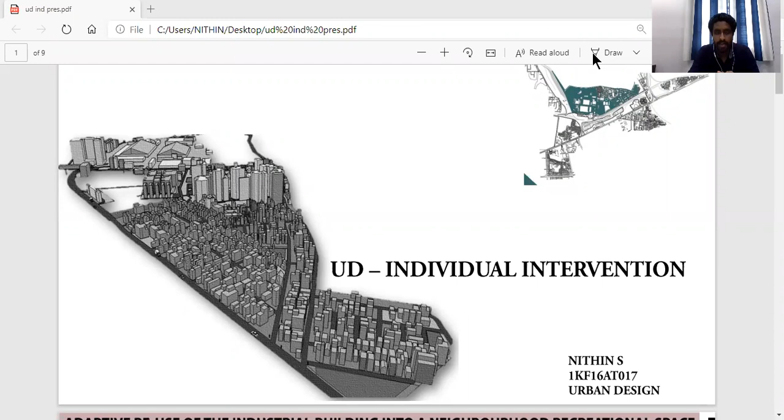This presentation is about the individual intervention proposed for the documented area of Baiyappanahalli. The task was to document a particular part of Baiyappanahalli given to us, find the flaws and negative spaces in and around the site, and propose an intervention to make that space lively, active and useful for the neighborhood.

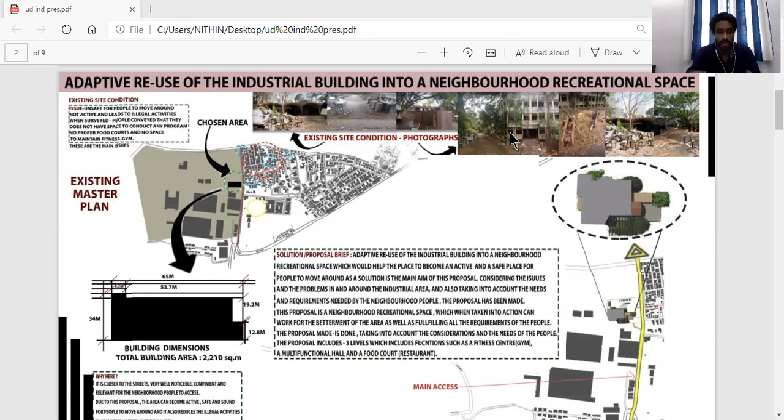My group was given a site near Sadananda Park. This is Sadananda Park and the complete site given to us. We found few flaws and negative spaces in the site, so we thought to make use of those spaces into a recreational space so it could become an active and useful space for the neighborhood.

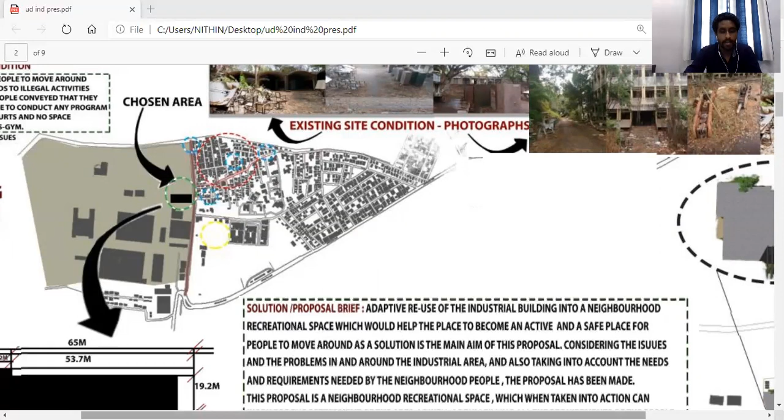Among which, I chose the industrial area. This marked portion is the industrial area. Why choose this particular industrial area is that it has been abandoned for many years, and due to this many illegal activities are taking place in and around the site, which is not safe for people to move around. These images show the industrial area which is not being used for many years.

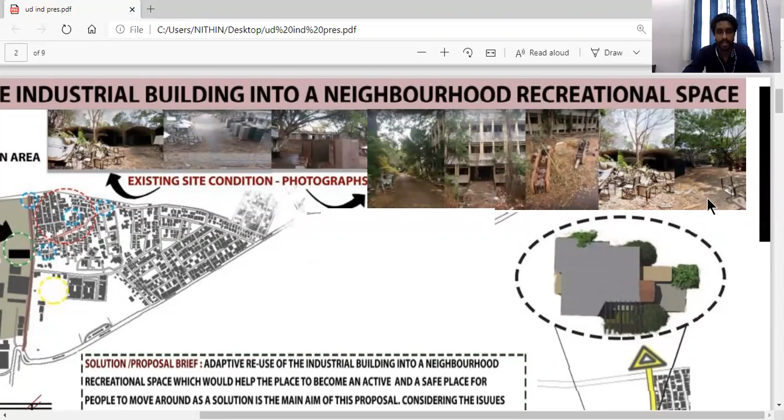As a solution to this, what I thought was to choose a part of the industrial area, in fact choose a building, and redevelop and reuse that building into a recreational space so that it could become an active and useful space for the neighborhood.

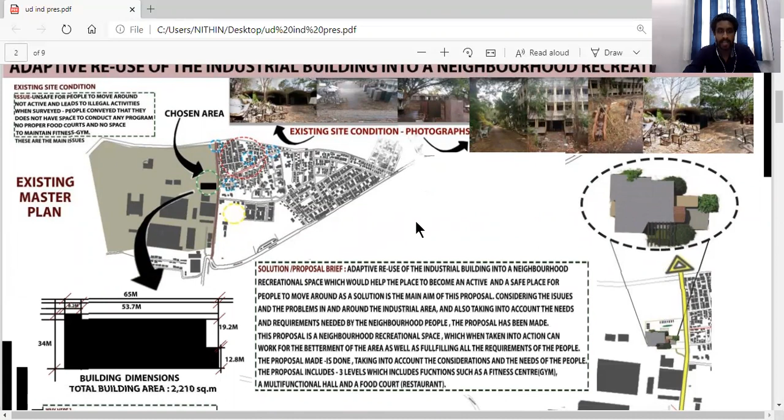So adaptive reuse of the industrial building into a recreational space was the main aim, and it houses functions such as a multifunctional hall, a food court, and a gym.

Why choose these particular functions is that when surveyed, people said they don't have a particular place to conduct any program or function, they don't have a proper restaurant nearby, and also a few of them said they don't have a particular place to maintain fitness or work out. Considering all these facts, these functions have been chosen.

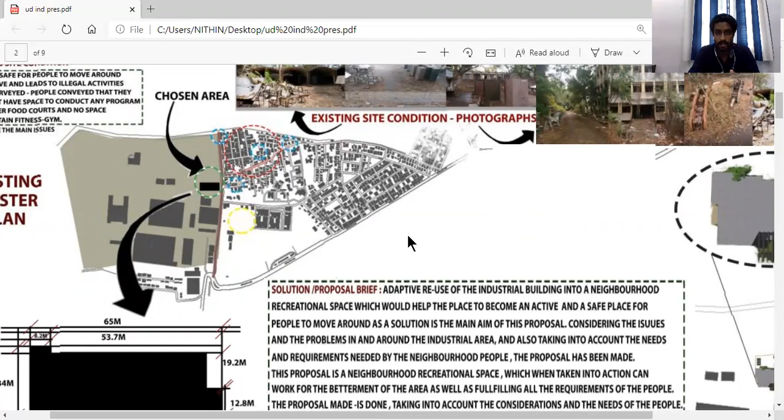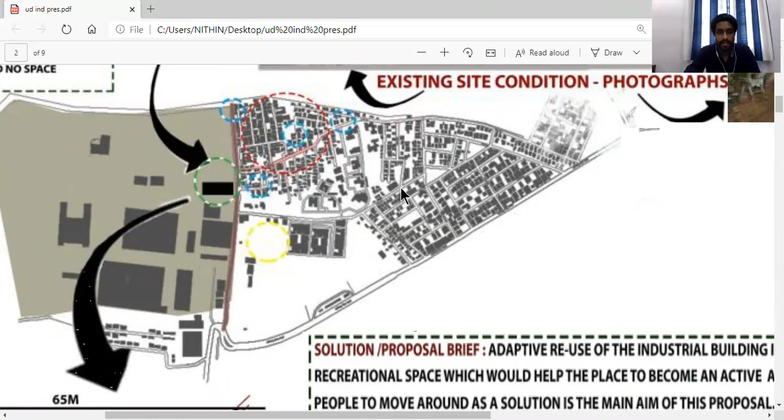As mentioned earlier, a particular block has been chosen in the industrial area. This rectangular block is the block chosen. Why choose this particular block is that it is closer to the streets, relevant, convenient and useful for the neighborhood people to access.

Moving on to the proposal brief of the intervention, the main aim was adaptive reuse of the industrial building into a neighborhood recreational space, which would help the place become active and safe for people to move around.

Considering the issues and problems in and around the site, and also taking into account the needs and requirements of the people, this proposal has been made. This proposal is mainly a recreational space which, when taken into action, can work for the betterment of the area as well as fulfilling all the requirements of the people.

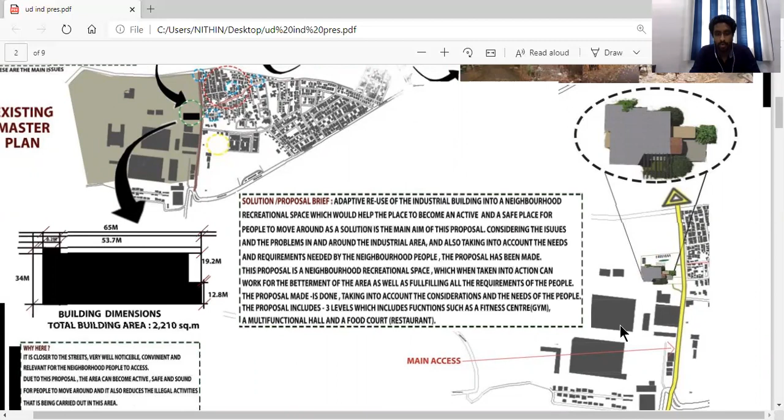As mentioned earlier, 3 functions have been provided based on the survey done: a fitness center, a multifunctional hall, and a food court. This is the existing master plan.

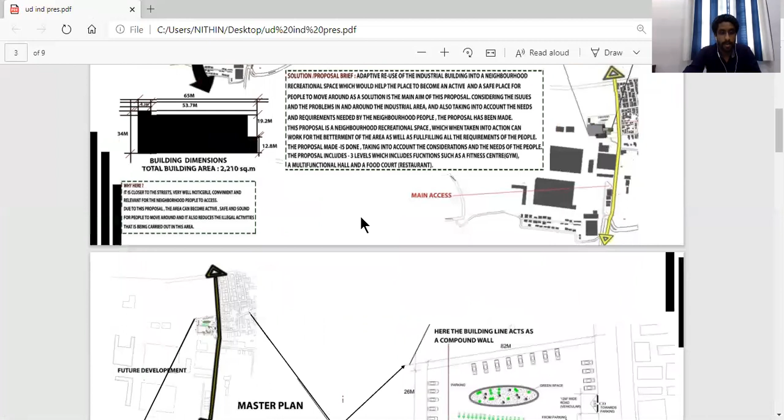Moving on to the proposed master plan, this is the proposed master plan, and this yellow line indicates the main access towards the proposed intervention.

Towards the right, you can see the zoom plan of the master plan, where 3 entries have been provided. This entry acts as the main pedestrian entry. Adjacent to it, an access leads to the parking provided next to the proposed intervention, and also a service entry has been provided. Since there is a food court, a service entry is needed, so this access acts as a service entry.

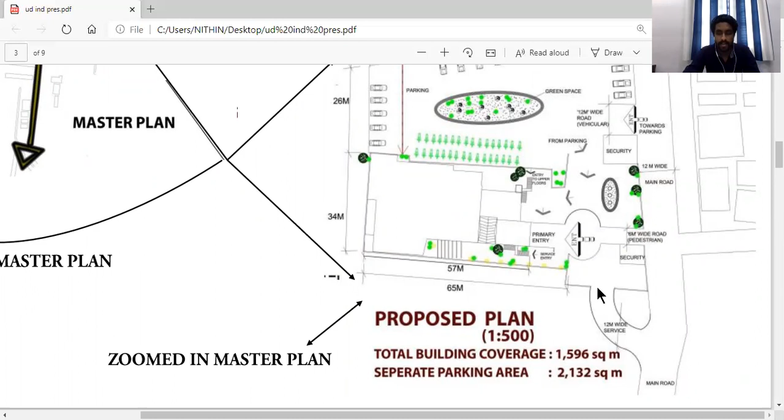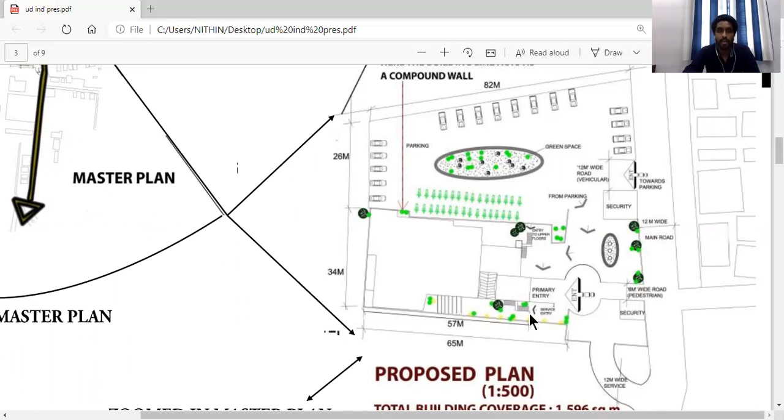This pedestrian entry directly leads to the building, and the left out space has been provided with greenery, as you can see, and has also been retained by a few of the existing trees. The total building coverage will be about 1,600 square meters, and the parking provided spans an area of about 2,130 square meters.

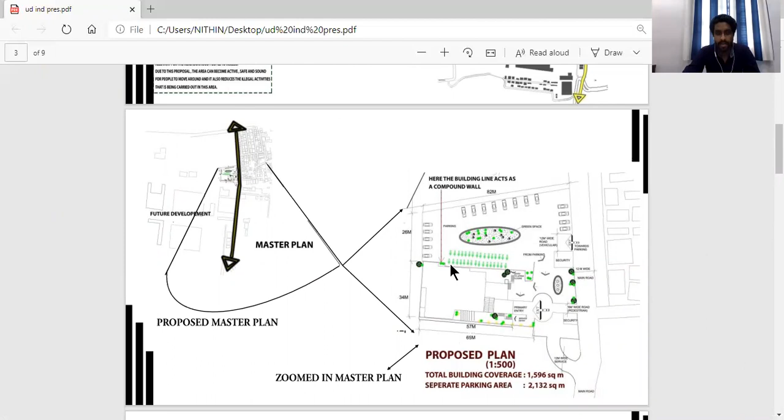Moving on to the plans of the proposed functions, the existing wall system has not been followed except at a few lines. The walls have been pushed in and out, projected to give the existing building a new form.

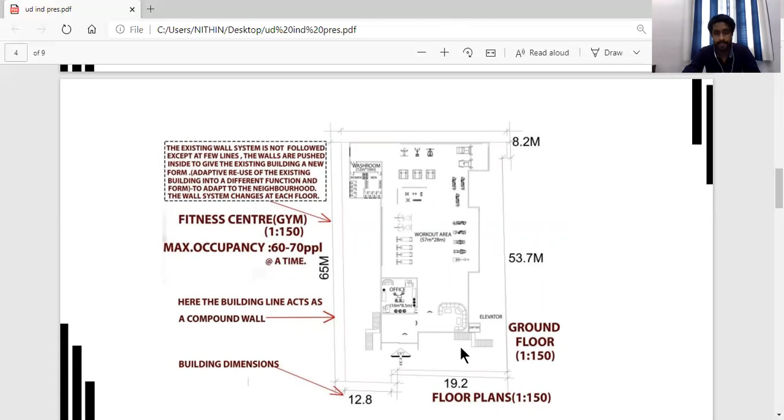This ground floor plan spaces function for a fitness center, with additional functions provided such as an office space and separate washrooms for men and women. This office space and washroom have been followed in the next 2 floors as well. It can occupy a maximum of about 60 to 70 people at a time.

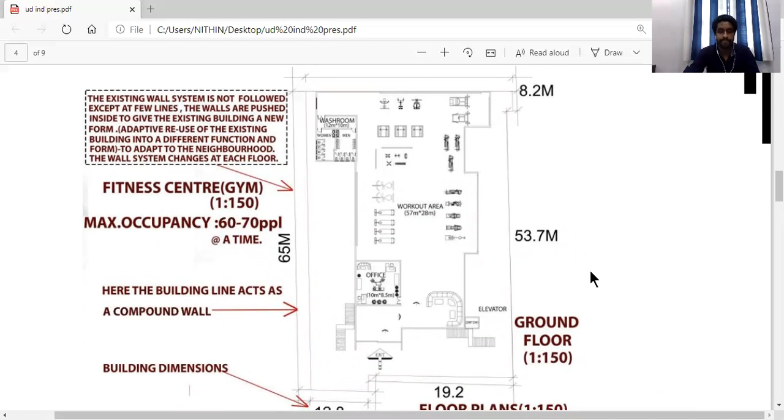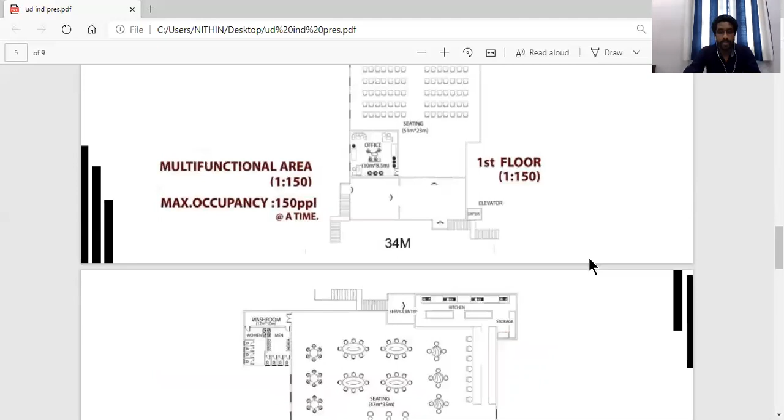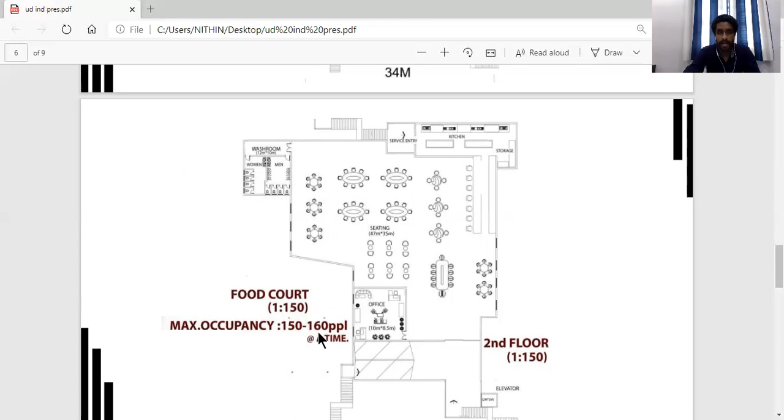Moving on to the final plan, which spaces function as a food court and also a kitchen, a service entry, storage, separate washrooms for men and women, an office, and an outdoor seating space. It can occupy a maximum of about 150 to 160 people at a time. These numbers are derived from standards as well as from the building bylaws.

So this is about the plans. Moving on to the sections, two sections have been cut. Section BB is horizontally cut through the plan. Section AA is cut vertically through the plan.

As mentioned earlier, it's a G+2 structure with the context shown. The ground floor spaces function for a fitness center, the first floor spaces function for a multifunction hall, and the second floor acts as a space for a food court.

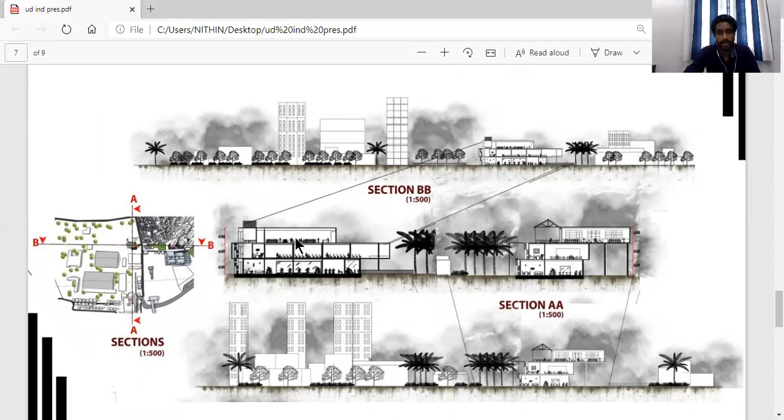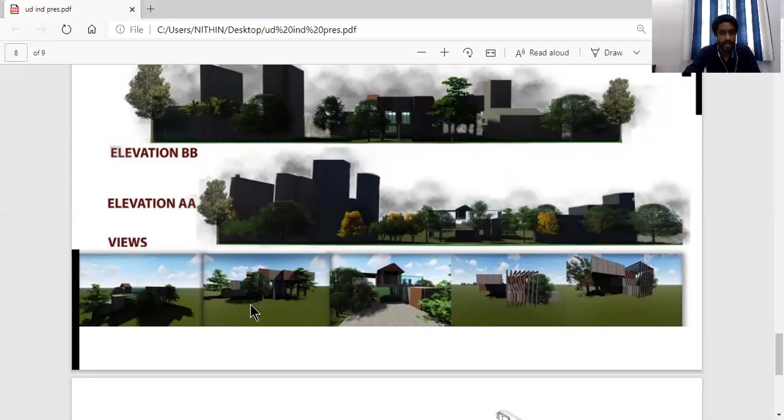Moving on to the elevations, these two are the elevations of the proposed structure, and at the bottom you can see the views of the proposed structure taken at different angles. The material used is fly ash block as well as red bricks. A few pergolas have been provided, and as mentioned earlier, a few of the existing trees have been retained as well.

So this is about the individual intervention proposed. When this is taken into action, the industrial area can become an active, useful space for the neighborhood people to access, and also a safe place for people to move around.